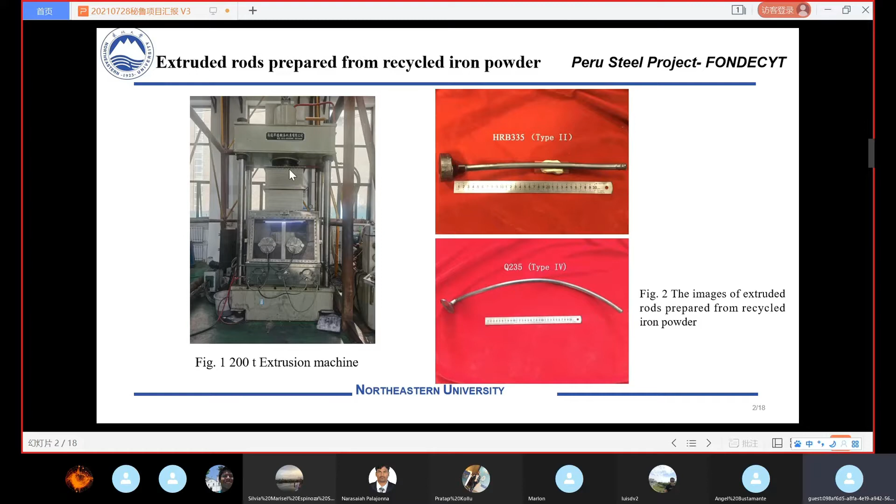This one is HRB 335, which is made from the type 2 powder received from the pellet. And this one is Q235, prepared from the type 4 powder received from the pellet. Firstly, we use this machine to get the extruded rods, and this is the rods we get.

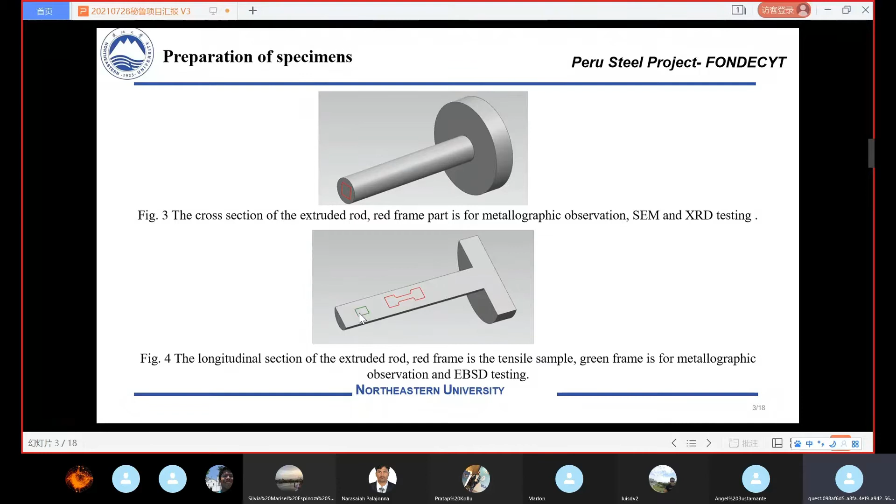Besides the cross section of the extruded rods, we also observe the microstructures along the longitudinal section of the extruded rods; this is the extrusion direction. This red specimen is for the tensile test, which is used to measure the mechanical properties. The tensile loading direction is parallel to the extrusion direction. And here is a green square. This specimen is for the metallographic observation and EBSD testing, and the results will be shown in a later slide.

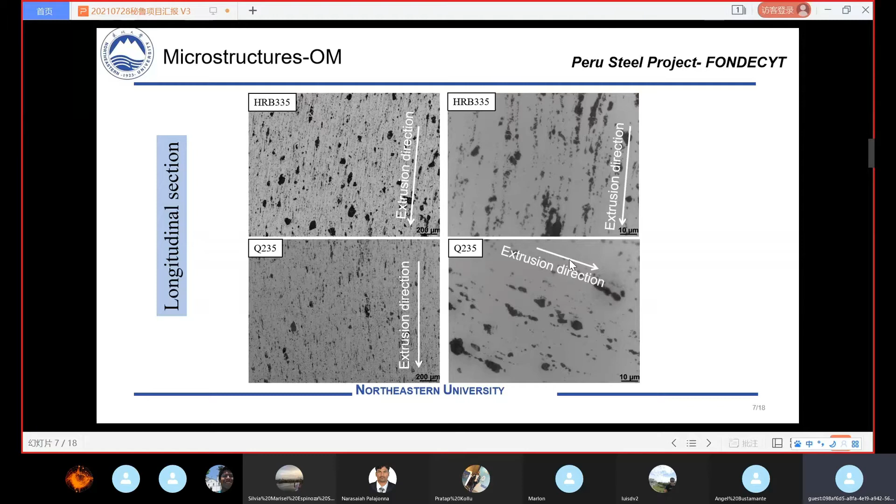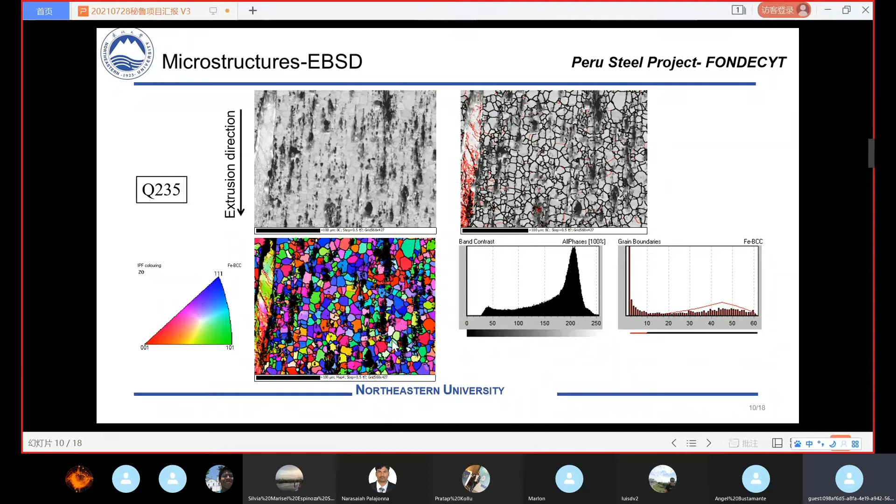And then we compare the microstructure in the Q235. Here are the EBSD results of Q235. We can find that in this alloy, the number of the low angle grain boundaries is much smaller than in the HRB 335, and we did not find elongated grains along the extrusion direction, which indicates that dynamic recrystallization occurs during the extrusion, because the grains here are equiaxed grains. They are not elongated along the extrusion direction. Also we can find the extrusion texture in the Q235 here. This is the 101, and the 101 texture fraction in the extrusion direction is 37.7%.

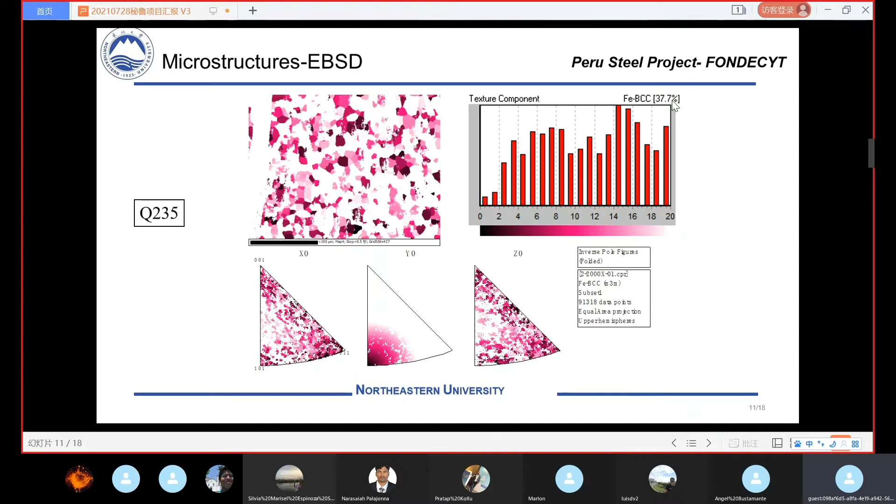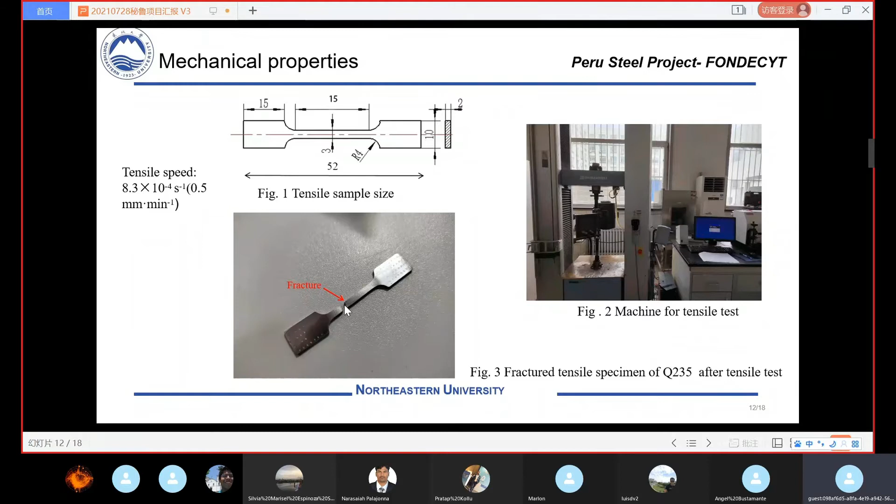The experiment is carried out at room temperature, and the tensile speed is 0.5 millimeter per minute. Before the tensile tests, we should polish our specimens with emery paper. After the tensile test, we get such a sample, where the fracture occurs. Actually, if we notice, this is in the middle of the sample.

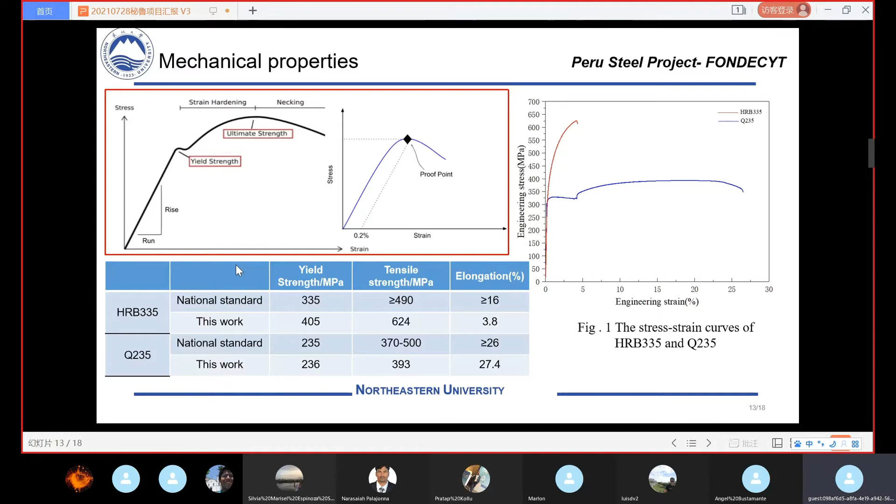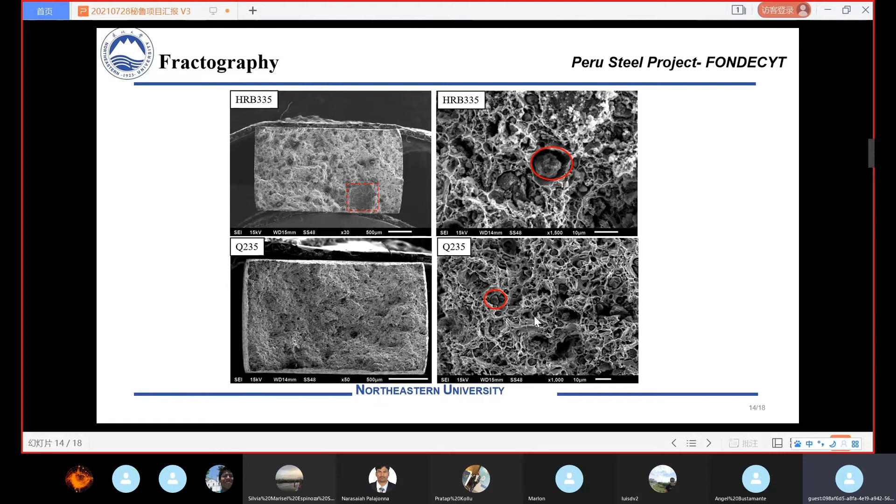we found that at the bottom of the dimples there are many large particles. During the deformation, stress concentration occurs near these large particles, and the crack initiates inside the brittle second phase, and then crosses the whole specimen. In Q235, the size of second phase is very small, so the number of dimples in Q235 is more than that in HRB 335.

Here shows the mechanisms for crack formation. The uniformly distributed second phase can lower the crack initiation possibilities. However, it will promote the initiation with increasing the particle size, and it is related to the particle shape. Here this figure shows the interface debonding around two different particles. The upper one is a round particle,

and the second one here is ellipsoidal particles. The shape is ellipsoidal, and here we can find what we call debonding at the interface between the matrix and the particles. So the round particle is equivalent to the micro void, and the ellipsoidal particle is equivalent to the micro crack for the crack initiation process.

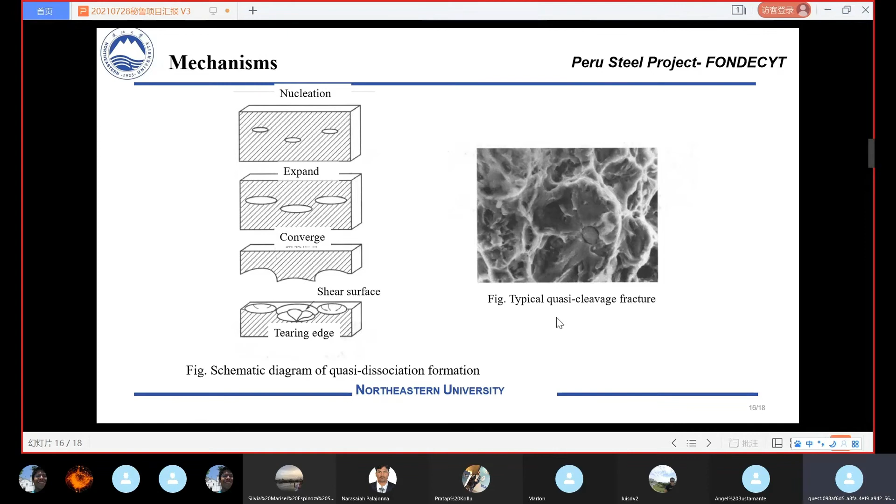And then the potential quasi-cleavage crack initiation sites are micro voids, clusters, and hard particles. If the crack initiates, then it will propagate outwards. So the second phase plays an important role in the propagation process, and of course in the crack initiation process. So we should take care of the second phase, and notice the size, shape, distribution, and the volume fraction of second phase.

Here is the summary of this report. Both the HRB335 and Q235 extruded rods are mainly composed of ferrite. Besides, they also contain second phases, which are formed before hot extrusion. The average sizes of the second phases in the HRB335 are relatively large.

It is confirmed by SEM that the second phase in HRB335 is mainly carbon particles and carbides. It is considered to be the residual carbon in the type 2 powders. The second phase in the Q235 is mainly silicide.

And from the EBSD results, the grains of the HRB335 are elongated along the extrusion direction, and there are a large number of small angle grain boundaries in the grains, while the grains of the Q235 are relatively regular. There are 101 textures in both HRB335 and Q235, and the HRB335 has a higher texture content.

From the engineering stress strain curve, it can be found that Q235 has better mechanical properties and meets the Chinese national standards. The poor ductility of the HRB335 indicates that large-size carbon particles and carbides are harmful to the elongation, while small-size silicide particles have less impact on the tensile ductility. Okay, thank you very much for your attention.

Okay, now we are going to start with the questions. Xiaoli Zhao, I have one question. In the second or third slide, you have the ingredients, the amount of materials, the tables. Yeah, there. In that table, you present HRB335 and also Q235. What is the amount of each of those ingredients?

Ingredients. We understand that Q235, for example, is a type of steel. So I understand that you added Q235 to the powders. How much Q235 have you added? No, sorry, the Q235 is the designed alloy. Okay, it is the result alloy, right?

Actually, we get two kinds of powders, the type 2 and type 4, and we use these two powders to prepare the HRB and Q235. So now we have two kinds of alloys. Excellent, I understand. So we use type 2 40 and type 4 80. Those are the ingredients, and all of the rest as well, to prepare Q235 and HRB335.

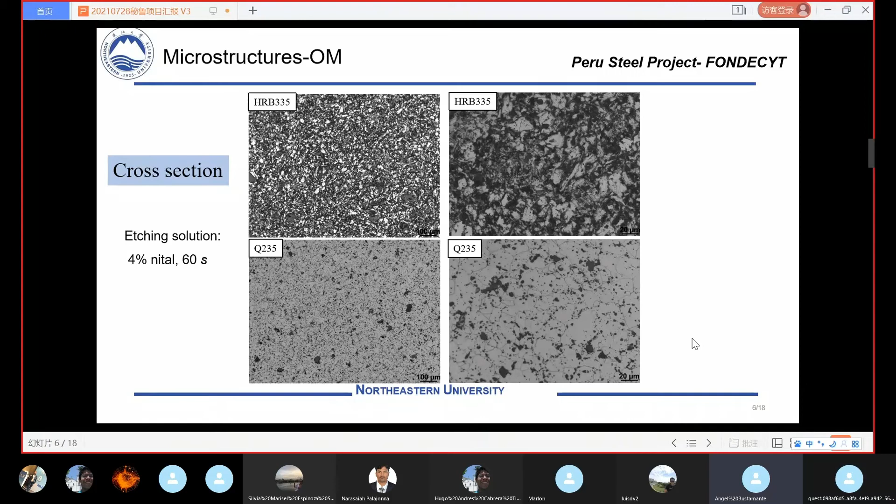These lines? You mean these lines? Yes, Professor Bustamante is asking if there is a possibility that there is an iron oxide or iron hydroxide. Is there any possibility? Or only the element, or only the iron. You mean the XRD patterns, yes? Yes. Actually, because the powder was reduced, now it is a metal. The matrix is a metal.

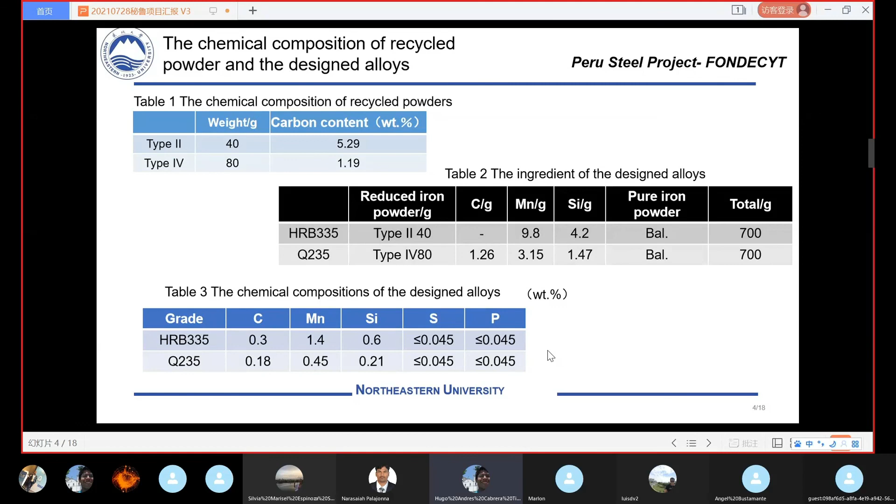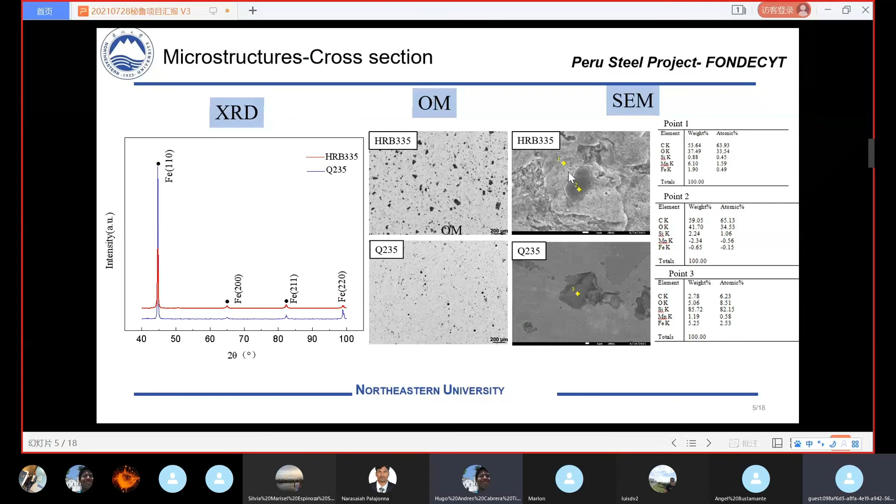And another question is, in what sense does the presence of carbides and carbon particles affect the mechanical properties of the system? Pardon? You mean this in the summary, the particles. Yes, in the summary you write the second phase is mainly particles, and the third one indicates that these are harmful. Yes, if the particle size is very large, it's harmful for the ductility, which means the elongation. Actually, we need to get uniformly distributed small particles to improve the mechanical properties.